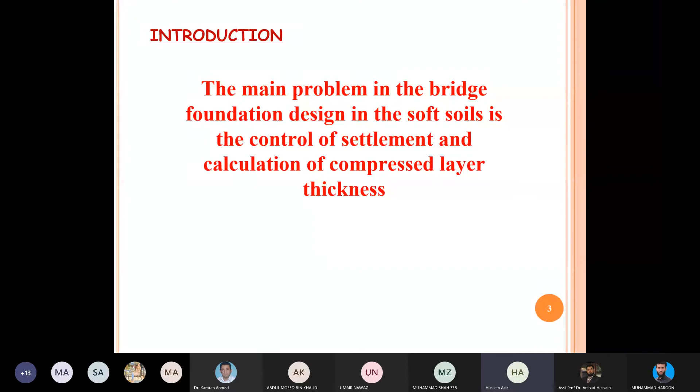Here you see a sample of a bridge. This bridge carries a high-speed railway, constructed in China, carrying high-speed trains at a speed of about 500 km per hour. Here is the foundation, the pier foundation and the girder of the bridge. This is the construction of the pier in the field, and this is the pile cap of the foundation. This is the final shape of the bridge, showing the process of finalizing it by putting the girder in place through the construction steps. This shows the bearing used to carry the girder.

So we start our explanation of the work. This work includes a field program, and this project is the Beijing-Shanghai project.

Hello, brother Hussein. Hello. Hello brother Hussein, are you there? It seems that he's offline, I'm not sure, but his screen is visible. Yes, maybe it's just a connection issue, let me check on the phone. Dr. Arshad, do you have his direct number? Yes, I'm contacting you, I'm calling you.

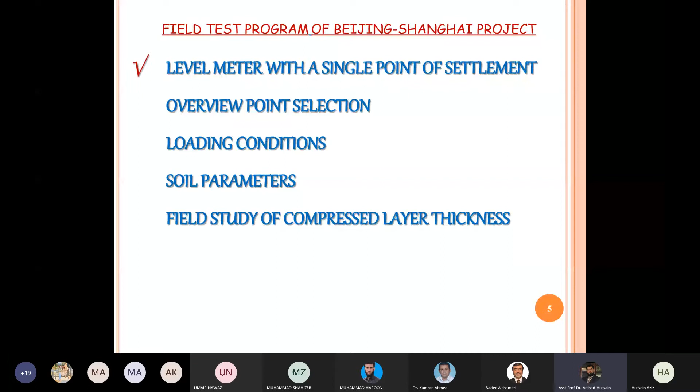Okay brothers, this work focuses on the field test program of the Beijing-Shanghai project. There is a new technique used in this project called the level meter with single point settlement. What does this mean? As you see in this figure, this technique is used in this project. We put a liquid level settlement gauge above the pile cap, and inside the pile, during construction, we put the single point settlement gauge. As you see, this is the pile, and we put this single point settlement gauge. What is the benefit? This is used to calculate the compression of the soil at this depth or point. The second one is also used to measure the compression at this depth, and the third, fourth, and so on.

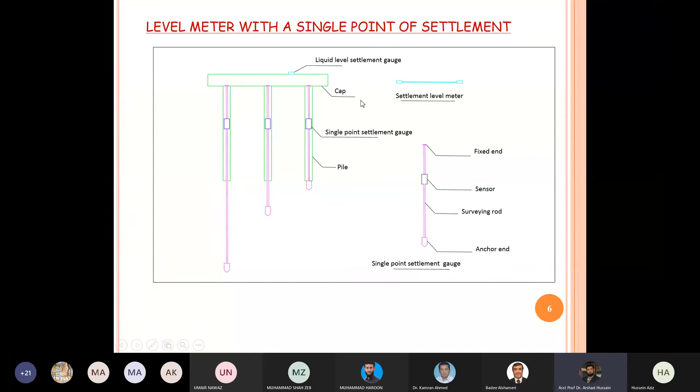As we see in this figure, the single point settlement consists of a fixed end, which is fixed between the pile and the pile cap, and there is a sensor to measure the compression, and the surveying rod, which is extended along this pile, and an anchoring end, which reaches the required depth. This is the settlement, void settlement, and liquid level meter, which works upon the equality of the liquid. This is the technique used to measure the compression.

We see here again, this is the single point settlement. This is the sensor, and this is the rod, and here we put the top cap. Actually, we have three liquid levels with the same level of liquid.

But when the settlement happens for the bridge, of course the level of the water will be different. Therefore, we will measure the total settlement. The main concept of calculating the settlement is to calculate the final settlement, which will be calculated here by the level liquid settlement gauge.

This is put, as we mentioned before, on the top of the pile cap. Therefore, when the pile cap is settled down by the settlement or by the compression, this device will calculate or measure the total settlement. The total settlement, including the compression, will be here in this position, the position of the pile.

This is the compression, in addition to the settlement under this position in the compressible area. Therefore, this device is used to measure the total settlement, which consists of the compression in this position of the single settlement account, and also the settlement under the pile bottom here in the compressed soil area.

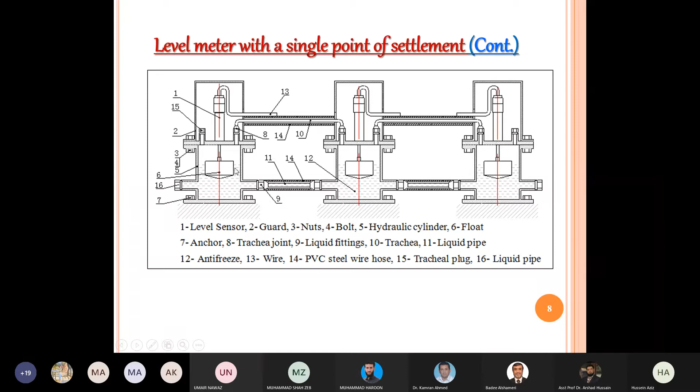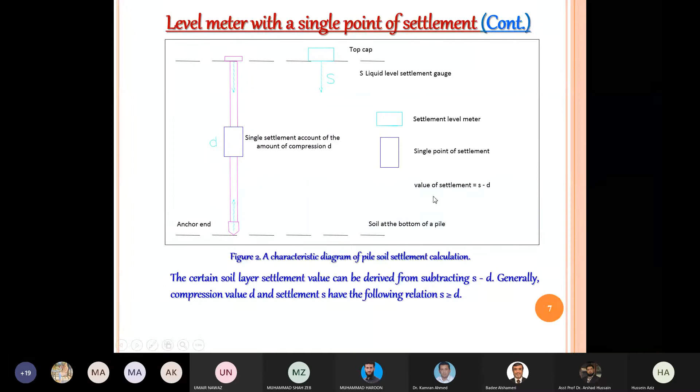At the beginning, the liquid was the same for the three, but when one of them that is put on the pile cap of the bridge settles down, the liquid level will be different. Therefore, this difference will calculate the total settlement. As we mentioned before, the total settlement we named S. We should subtract from it D, which means the compression here, to find the settlement under the pile bottom. This is the concept of our work.

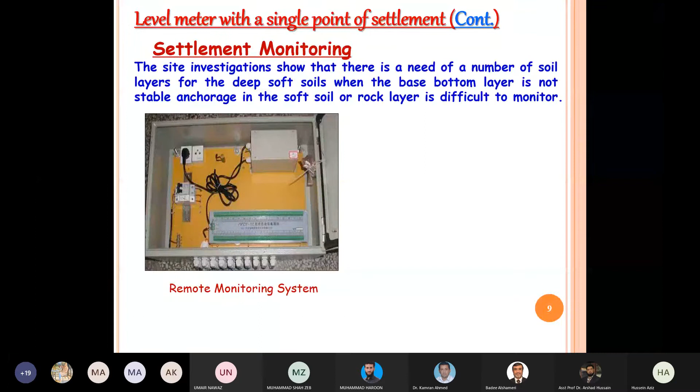This device is used in the monitoring system. As you know, we cannot calculate the settlement by hand or manually. We should use an electronic device to measure the settlement. Therefore, we use this device, which is named the remote monitoring system.

This figure shows the settlement liquid level meter. There are two, which we mentioned before, that will be put on the zero point of zero settlement. And the third one will be put on the surface of the pile cap. This method is used to calculate the settlement in deep soft soil areas, and when the rock layer is difficult to monitor, meaning it is very deep, this technique is beneficial for this case.

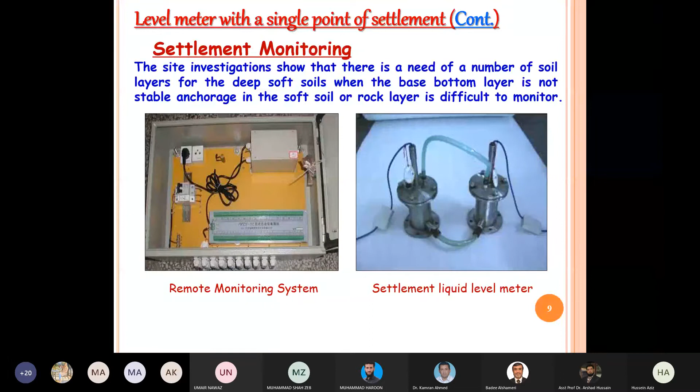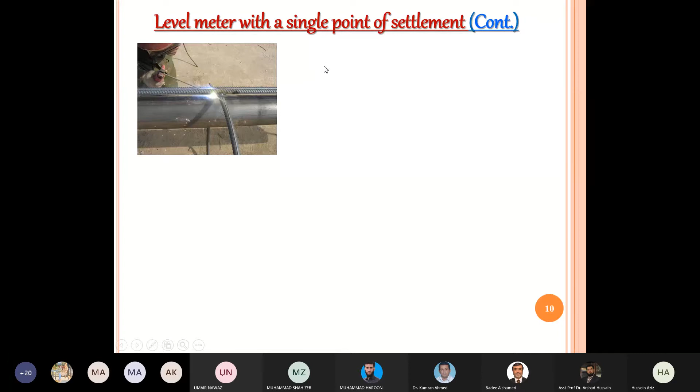The process or procedure of construction and testing: as you know, there is a reinforcement of the pile. We should put this pipe, which means it is the settlement point. We put this pipe and weld it, as we see in this figure. This is the first step.

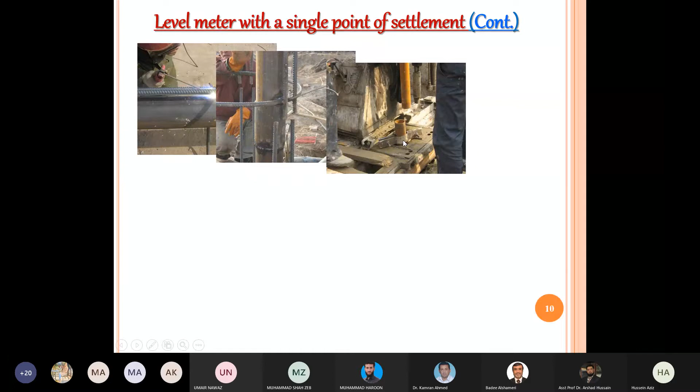After that, we make it vertical, to put it inside the casing of the pile. After that, we fix it inside the pile casing. This is the pipe, and we fix it. If we need to elongate it, we put another piece, as we see in this figure. And after that, this is the pipe only.

This rod means the single point of settlement. As we mentioned before, this is the single point of settlement. We put it inside the pipe. As we mentioned before, it consists of a rod, a sensor, and a fixed point.

We put the sensor here, in the middle as we mentioned before, and connect it by wire, and connect it with the remote device like this. After that, we put concrete here to make it stable and not moving, taking only the wire, and connect the other wires. This is the device used to measure the settlement.

This is the level meter. This one is the level meter. As we mentioned before, it will be put on the pile cap. This is the pile cap.

After that, we fix the level meter here and connect the other wires, and then we start measuring the settlement by putting the level meter on the pile cap and putting the other.

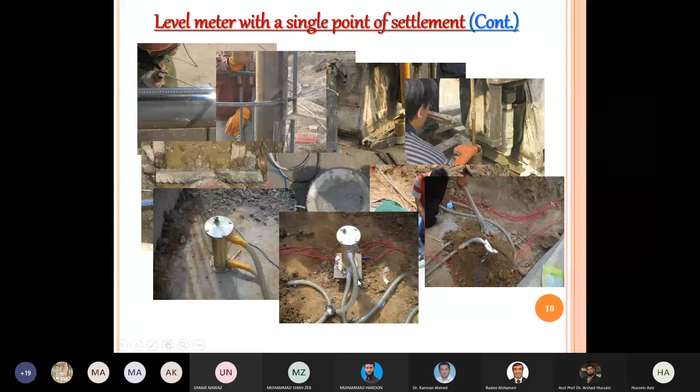This is the reference one, which connects with the other level meter, and as we mentioned before, it will be put in the position of zero settlement. This is the position of zero settlement. This is the procedure of the testing.

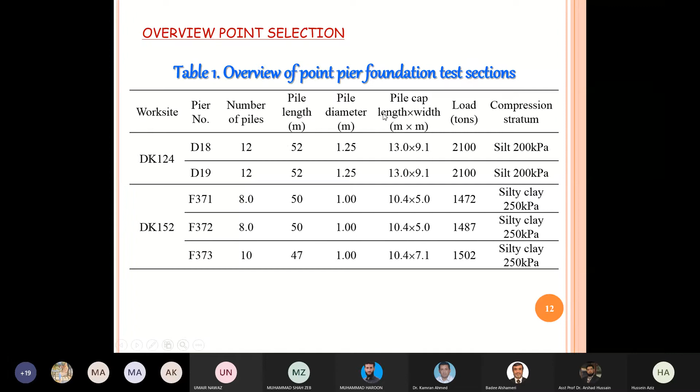And the load here is more than the second one. Here the load is about 2100 tons, while here the load is more or less, as we see here. Therefore, the requirement of the design in DK124 is more and needs a larger number of piles, larger pile depth, pile diameter, and larger pile cap dimensions.

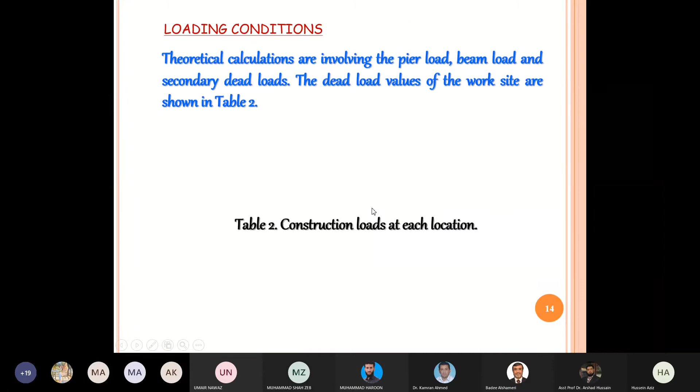The loading condition consists of the construction loading. That means when we calculate the settlements in this project, we don't need to take the live load into consideration. Why? Because the final settlement will be obtained after the final step of construction. The first step of construction is to put the piles, then the pile cap.

After that, the beam. We start to calculate the settlement at the beginning with the beam, which is here. After that, when we construct the beam, then the secondary dead load, which means pavement, fence, and finishing, etc. This is the total load.

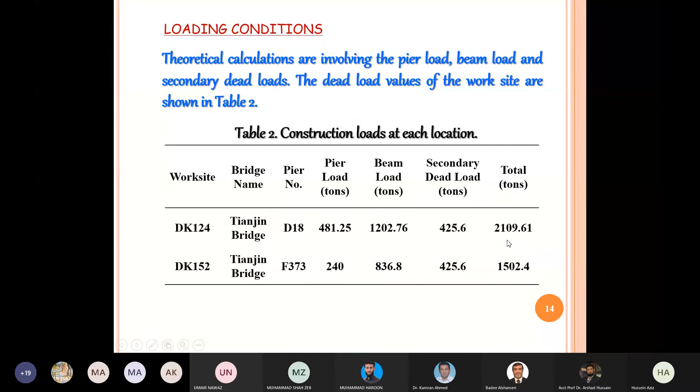This total load means the dead load, not the live load. This will be taken into consideration to calculate the settlements, not the live load. As we see here, DK124 has 2,109 tons, and the second one is like this - that is the difference between them.

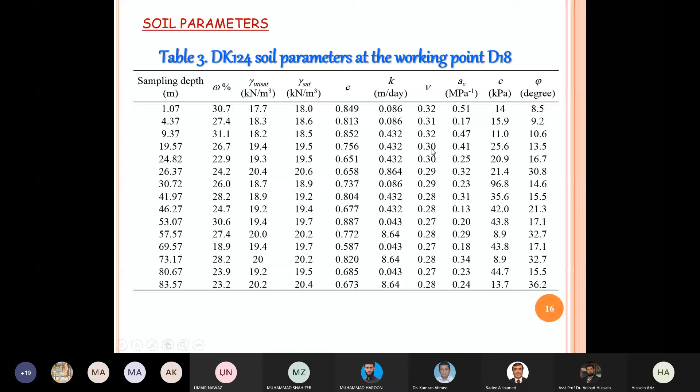The soil parameter - when we study a project, we should take into consideration the soil parameter. This table shows the soil parameter of the work site DK124. We should know the water content, gamma saturated, unit weight, void ratio, coefficient of permeability, Poisson's ratio, cohesion, and phi, etc. This is the soil parameter which we know and is useful in our calculation.

Field study of compressed layer thickness. Now we will study the compressed layer thickness, starting with the DK124 work site.

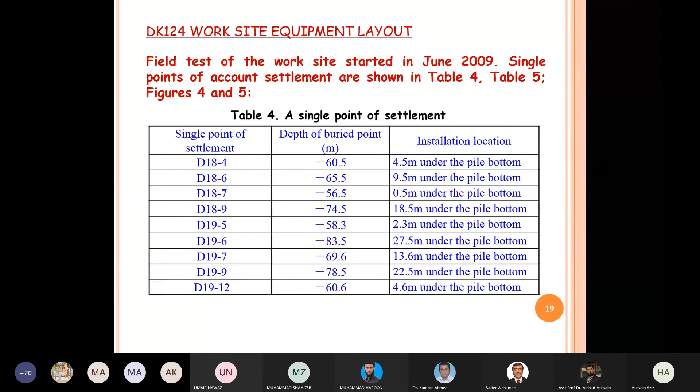After that, we will get DK152.

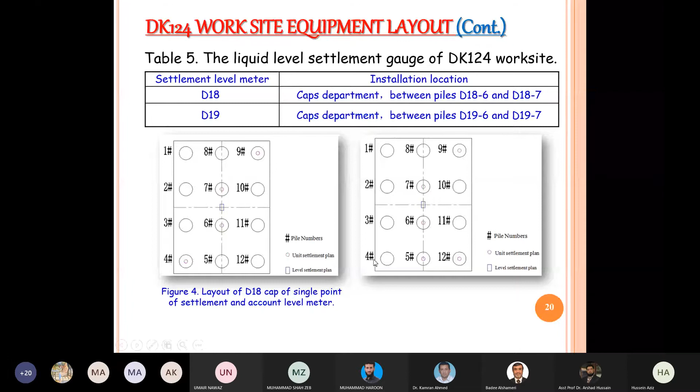My brother Rashid, everything fine? Go ahead. Yes brother, you can continue. Yes, okay, that's fine, because I only see the screen of PPT.

This DK152 also, at the work site, we take different depths under the pile bottom, as we see here.

55, that means when we subtract the depth of the pile from 55, we get 5 meters under the pile bottom and 10 meters. Within the pile bottom, the depth of the pile is 50, so 50 minus 50 is 0. This is the pile bottom position.

After that, 20.3 under the pile bottom - we take different depths under the pile bottom to calculate the compression or settlement there. Why under the pile bottom? Because the compressed layer is under the pile bottom.

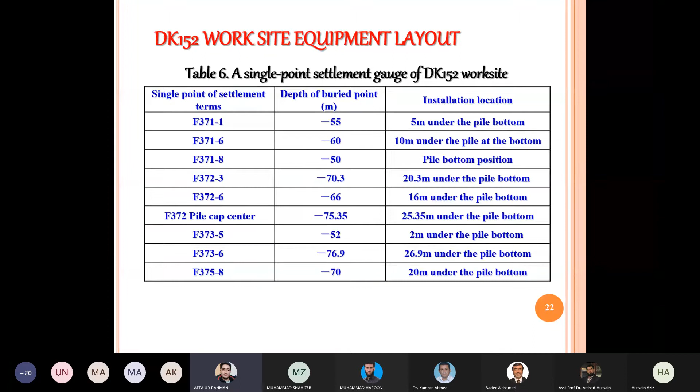We also see here the second work site, DK152. The dimension here is less than the first one, and how many do we use? Only three. The first one we used three of here because the requirement is less. This is for F371.

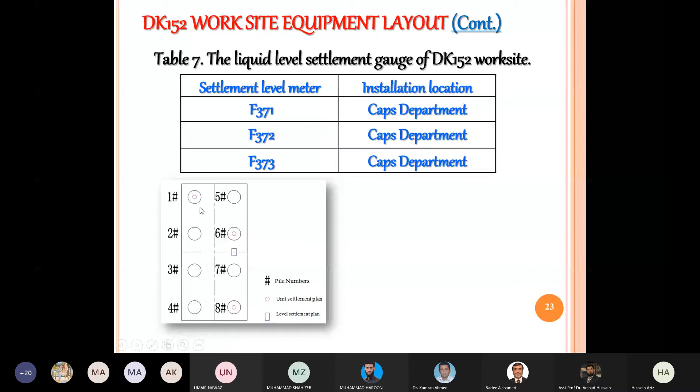And this is for 372, where we use only two single point settlement units - two units of the settlement plan. Here we use three because the dimension is bigger than 372. This is for 373.

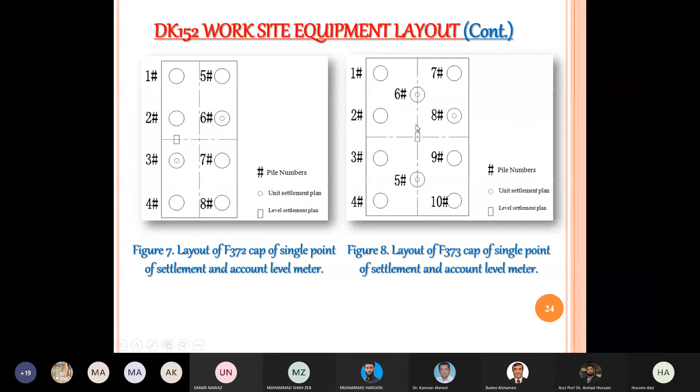It becomes stable, and the difference becomes very small. That means the compression becomes less and less as the depth increases.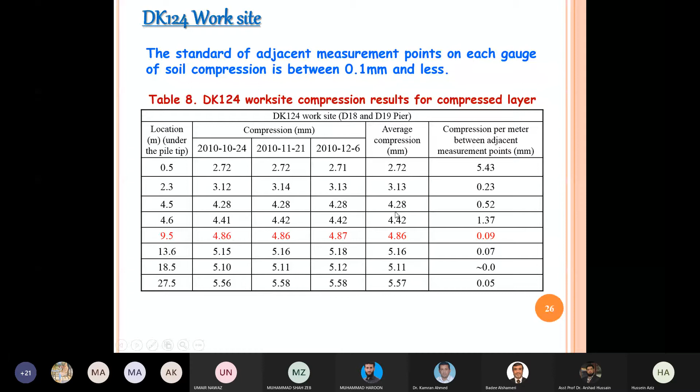The difference between 3.13 and 2.72 is larger, and also for 4.28. But for 4.42 and 4.86, the difference has become smaller.

After that, it becomes constant, for 5 only 5.

That means when we calculate the compression per meter - meaning how to calculate it - when we divide 2.72 by 0.5, we get 5.43.

This number is obtained by subtracting 3.13 minus 2.72, over 2.3 minus 0.5.

That means the difference between these values is 0.23, showing that the compression per meter has become smaller, approaching nearly zero.

At this point, we stop the calculation of settlement, and after that we consider the settlement at this depth to be 0.

That means 9.5 shows the thickness of the compressed layer. Why? Because after this point, the settlement will be neglected.

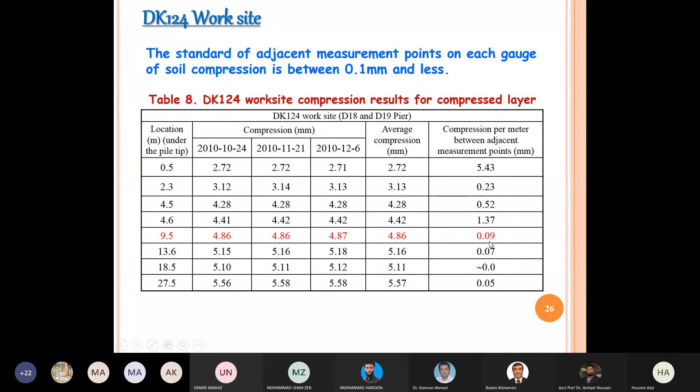Why? Because this is the cumulative of other depths. So we also take this work site DK124, the same way. We see the cumulative compression increasing with depth, and we should reach the final value.

This is the final value of settlement for both pier number 19 and number 18. We see the total settlement here with the construction steps reaching a value of about 7 millimeters, between 6 and 7 millimeters.

The value of 7 millimeters in our calculation, according to the standards and codes, is a reasonable value, because the limitation in the Chinese code for this project limits the settlement to about 10 to 12 millimeters. We now get a settlement of about 7 millimeters.

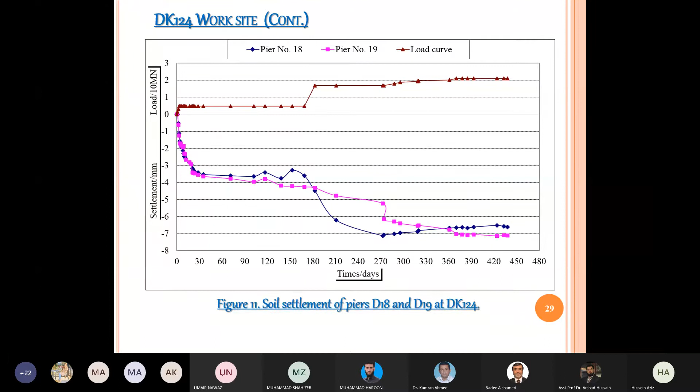We repeat this procedure for DK 152, the same procedure as before. Here also we will see the compression. The average compression per meter at depth 0.5 is about 8.25 millimeters. It will become minimized to about 0.09, meaning close to 0. When we reach this value, we stop calculating the thickness. We see that at depth 10 meters under the pile bottom, we get zero settlement.

After this depth, the settlement will be neglected because its value is very, very small. That means the thickness of the compressed layer for this worksite DK152 is 10 meters, while the first one DK124 is 9.5 meters. It's very near, so 9.5 and 10 can both be considered as 10 meters. Therefore, we conclude the compressed layer thickness is 10 meters.

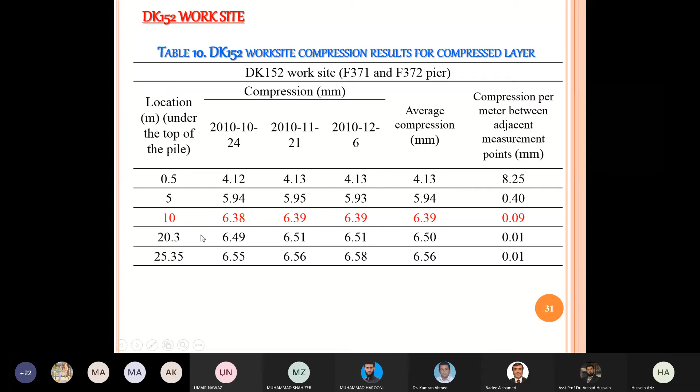Unfortunately, for this worksite F373, we don't have enough points to calculate the thickness of the compressed layer. This is because we start at 3 meters and then jump to 21. This is wrong; we should use 3, 5, 9, 10, reaching to 21. We get values of 3, 1.59, and at 21 it's 0.05, suggesting the compressed layer thickness is 21, but this is wrong. We should use more thicknesses, like 4, 5, up to 10. If we reach 10 we would get a similar value. Therefore, this result can be neglected.

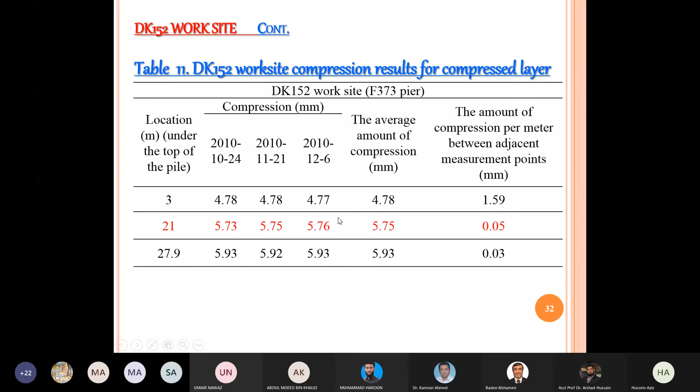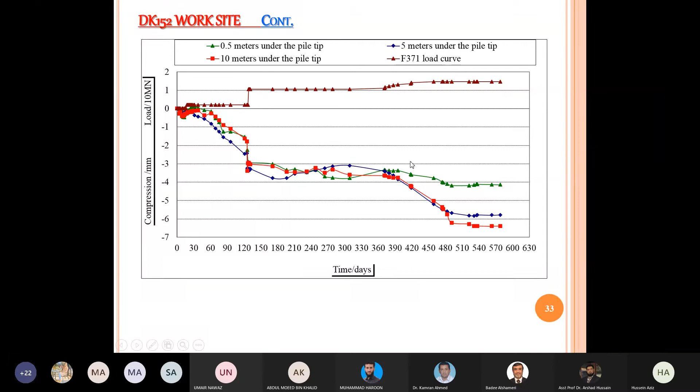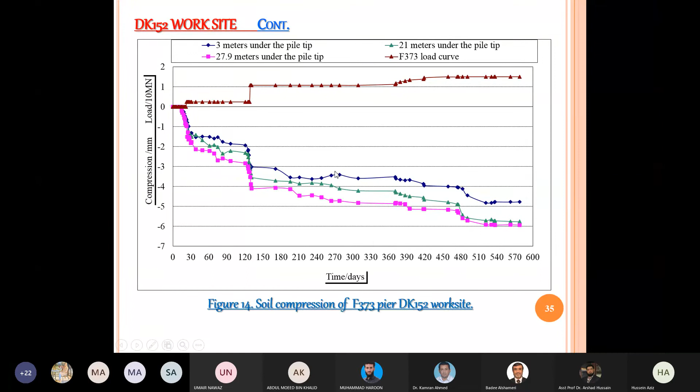This figure also shows the result of compression at different depths, also the second one. We should take the final one which calculates the settlement value. Here we see the final one for the 3-level gauge of F371, F372, F373. The final settlement value reaches about 8 to 9 millimeters. As mentioned before, the Chinese code limitation for settlement in this project is from 10 to 12 millimeters, and we reached 8 to 9 millimeters here. That means this is okay, our design is okay, and there is no problem in our calculation.

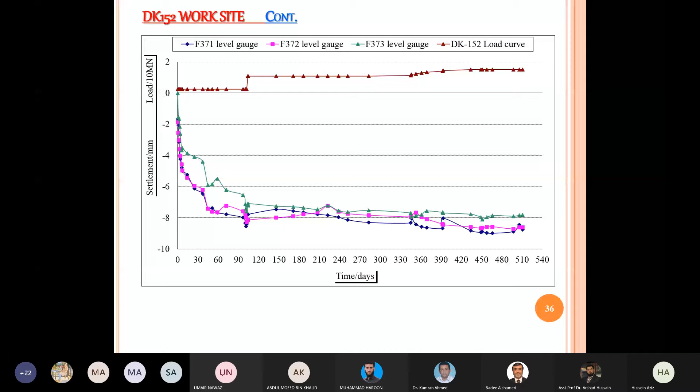This is the final values of settlement for the project. For DK124, we said before the settlement is 7 to 7.1 millimeters, and for DK152 it is 8 to 9 millimeters. These are the final values.

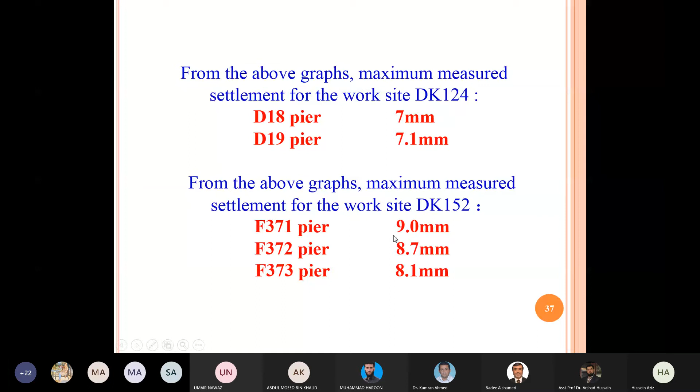The summary for this work: we calculate the compressed layer thickness for DK124 as 9.5, and for DK152 as 10. That means it's very near, so we can assume and use it as 10.

When we compare the compressed layer thickness and the dimension of the pile cap, we divide HS over B, where HS is the compressed layer thickness and B is the width of the pile cap. We see here 1.18 and here 2.5. This gives an indication that when designing the pile cap, we should use a width near the compressed layer thickness. That means when we calculate the compressed layer thickness, it should match the width, and when we divide them the result should be near 1. Here it's near 1, here it's more than 1, meaning this dimension is wrong and not suitable for our design.

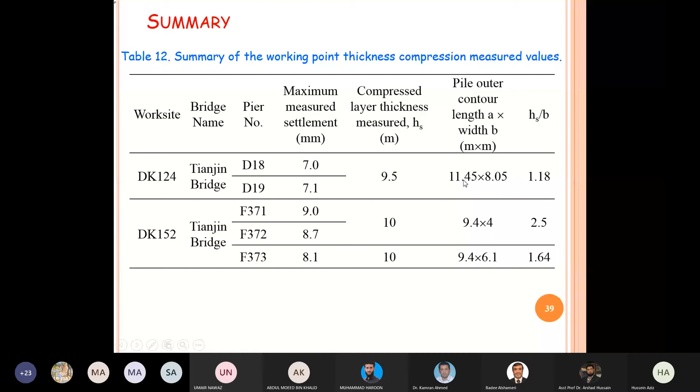Here also we see the codes used. In China there are many codes; for example, this code is JGJ 94-2008, and this one is another code depending on the strain control method. There are different codes using different calculation methods. The first and second depend on stress, while the third requires explaining some concepts for how to calculate this value.

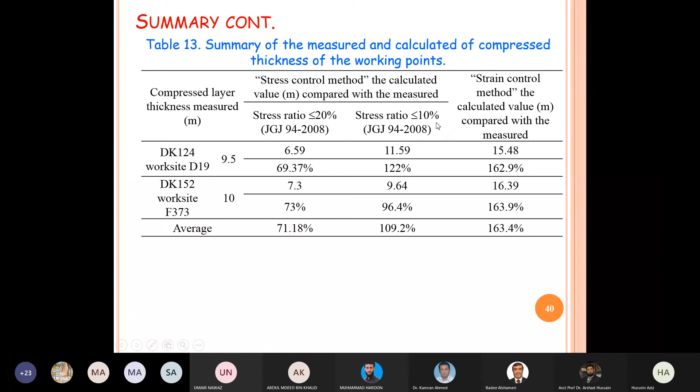The stress control method depends on calculating the stress. When we calculate the settlement, we should reach a depth corresponding to about 20% of the total stresses. At this depth we stop the calculation; this is named the stress control method.

For the strain control method, we should reach a depth corresponding to about 2.5% of the total settlement. At this point we stop the calculation and consider it the point for calculating the compressed layer thickness.

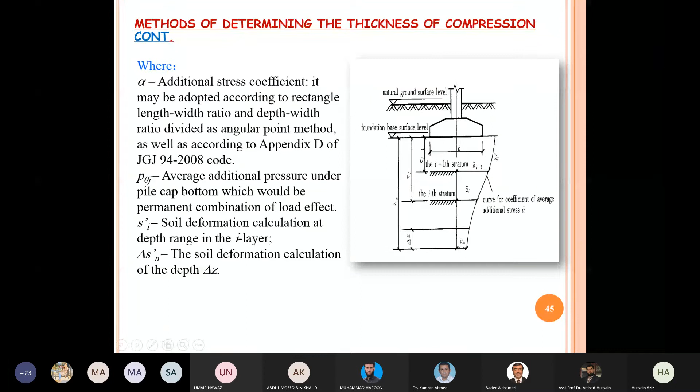Here we return to this table. We calculate the settlement using this code, and also calculate the thickness of the compressed layer. Using this code, the thickness of the compressed layer is about 6.59, while in the field it is 9.5.

This 9.5 is the real value, the true value, because it is maintained from the field, and 10 is also a real value because we obtained it from the field. 6.5 means it is wrong or not accurate. Also 7.3 is not accurate because the difference is about 70%. This is not accepted.

This method is not good for calculation. The other method uses a stress ratio less than 10%. What's the difference between the first method and the second method? This one reaches about 20% of stresses, and we calculate the thickness of the compressed layer.

But this method says no, 20% is not a good value. We should reach 10% to calculate the thickness of the compressed layer. Therefore, we calculate the thickness here about 9.6, which is very near to 10. Also here it is 11.59, also near 9.5, and better than this value. The difference here is 122.

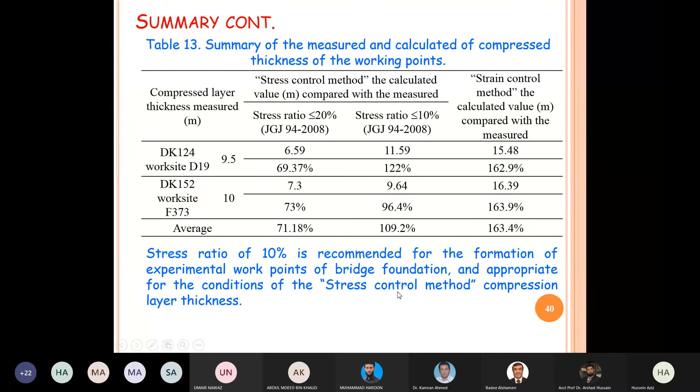But we should use a correction factor. How do we get this correction factor? By dividing the value measured from the field by the value measured theoretically, we get an empirical correction factor. This is used to correct our theoretical calculation, which is also done using the code.

The method of determining thickness of compression. There are two types of calculation: stress control method, as mentioned, when we reach about 20%, or another version when we reach 10%, which is better. And strain control method depends on the calculation of settlement, when we reach about 0.025 of the total settlement, after which we calculate the settlement.

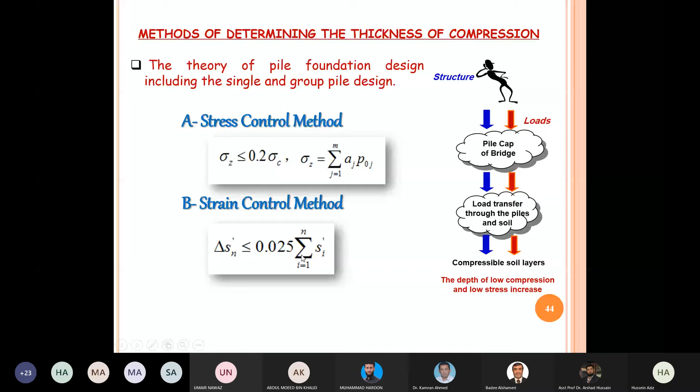That means when we reach a value that is negligible in the calculation of settlement, or the settlement is very small, we stop calculating the settlement. Here we also mentioned the distribution of stress in this figure, and we will mention the codes used in this study.

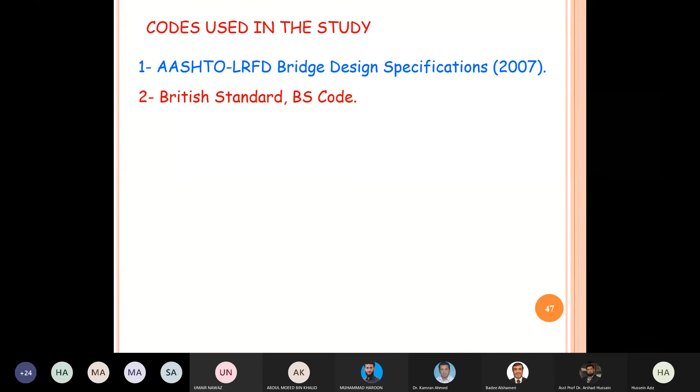We use in this study the AASHTO code, the American code, the British code also, but we don't mention this result. Three Chinese codes, and the British code, and AASHTO code.

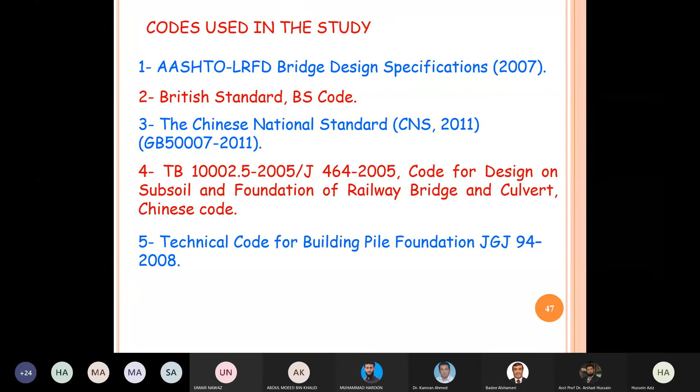Therefore, someone may ask why the theoretical calculation is different from the field calculation. Why do we get a very high value in theoretical calculation? Does that mean the theoretical approach is wrong? No, it is not wrong.

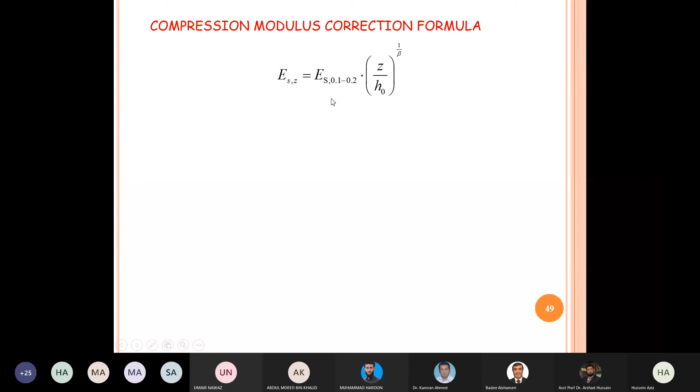But the inputs entered into the equations are wrong. For example, this value, E, is the compressed modulus, or compression modulus, which is calculated between two stresses, between about 100 kilopascal to 200 kilopascal. This is suitable and gives a correct answer only for shallow foundations, but when we use deep foundations, this is not correct.

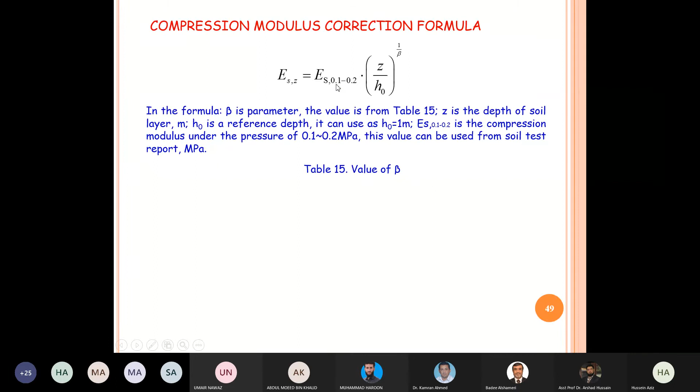While we use only a fixed value, only ES between 0.1 to 0.2, that means this is wrong. That means ES is increased by increasing the depth here. So we should make a relationship. Therefore, we propose this equation to calculate the compression modulus. Why? Because the compression modulus increases by increasing the depth, meaning it is proportionally increasing. So this is the first thing.

Also, we should fix the depth of the layer. Sometimes we use depth of layer 1 meter, sometimes depth of layer 5 meter. We should take this into consideration in our proposed equation. Therefore, we divide the value of Z by H naught, which means the reference depth. In our data, the thickness of our layers is about 2 meter, 1 meter, 3 meter. Therefore, we assume in our calculation H naught is 1 meter. But when we use another project, for example, where the thickness of the layers is about 5 or 6 meter, the H naught should be increased. So we mentioned that ES is depending on Z.

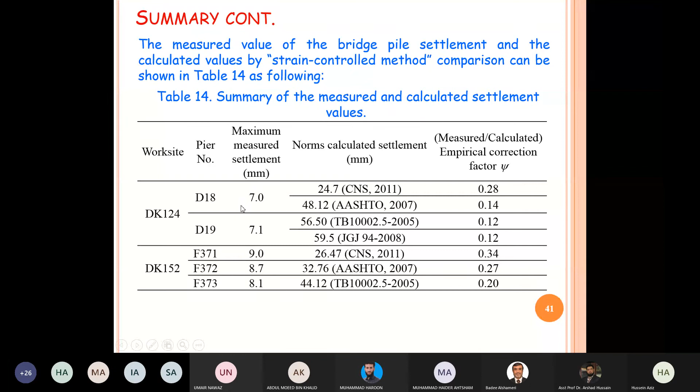Therefore, we should repeat our calculation. We said this in our course: the calculation was very different between the real calculation, the 7, and here very high. We will repeat this calculation depending on the new value of the compressed layer thickness. Therefore, we take this into consideration in our calculation, and we take these values here.

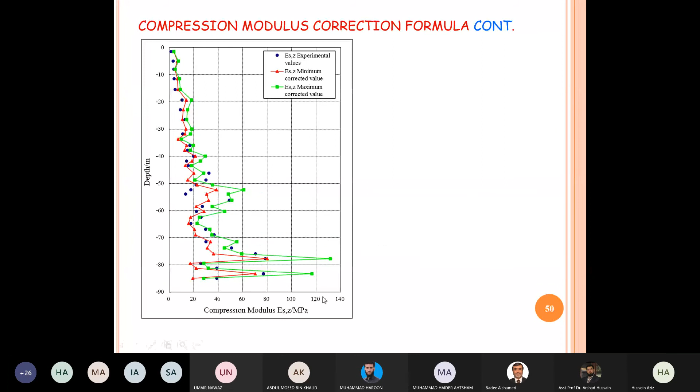We should also mention these dots, the blue dots. This is ES experimental values. We check this equation with the experimental value of ES. It is nearly matching - you see the blue one matching with the red and green. The blue one is the experimental value, the red is the minimum value, and the green is the maximum value.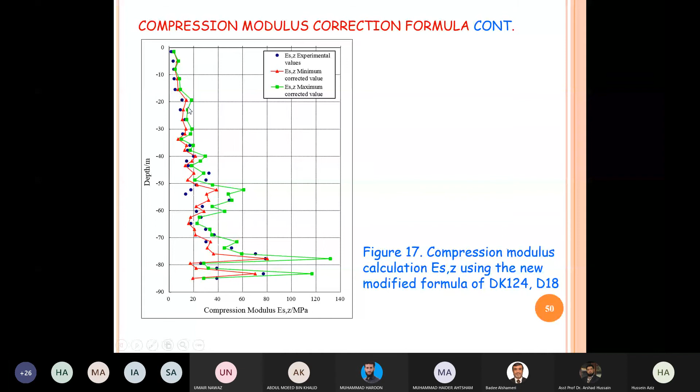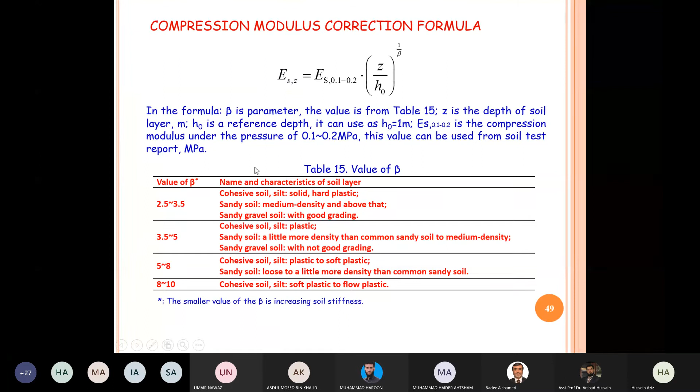Why minimum and maximum? Because in the table there are two values, 2.5 to 3.5, 3.5 to 5. That means for the value of beta, if we take this layer, we calculate ES for 2.5 and calculate ES for 3.5, so we get two values. The lesser value is the red one, and the larger value is the green one. This is for DK 124, and for DK 152 also we take this result. We see the result of our proposed equation is matching with the experimental value.

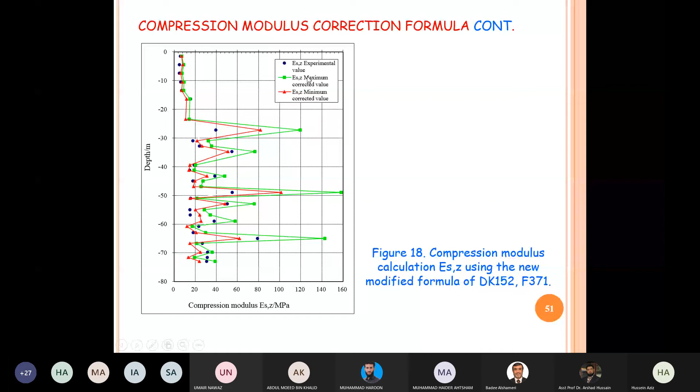Theoretical results - now we will check the theoretical results again using the proposed equation. Firstly, by calculating the thickness of the compressed layer. When we use ES 0.1 to 0.2 versus the proposed value of ES, we see the value of compressed layer thickness - 6.5 is the same, 22 is the same, no change. That means the proposed equation for ES is not beneficial for calculating the thickness of the compressed layer.

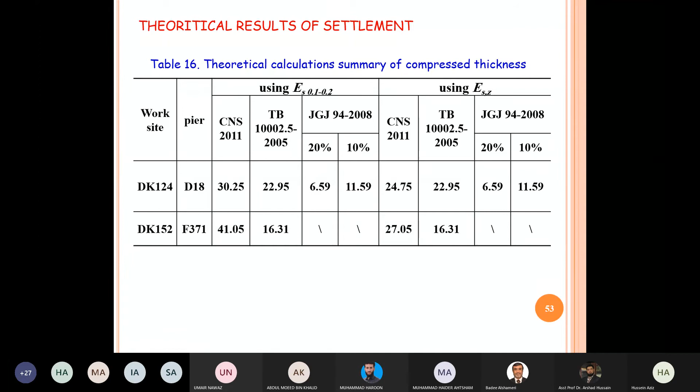We will check it again to calculate the settlement. We see the value of settlement using it turned from 65, for example in TB code, to 7.28. That means it's very good - we get a value very near to the field. In CNS code, it was 24.7; by using the ES(Z), it becomes 7.24. This is also very good. Also for others: 7.2, 8.1, 6.23. That means the result of the settlement becomes very good here. This proposed equation is suitable to be used in the calculation of settlement.

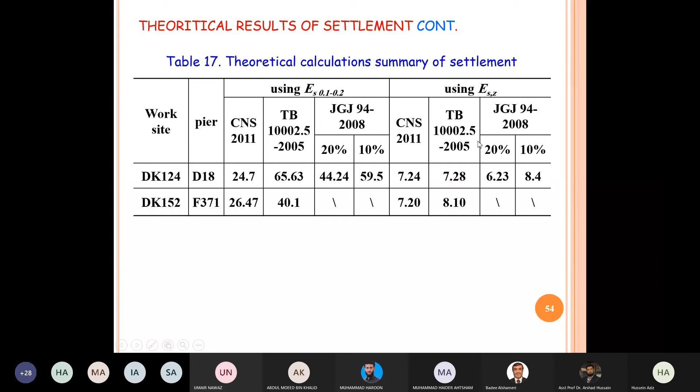We will check this proposed equation by using a finite elements program, Plaxis Foundation program. As you know, there is a program to calculate the settlement using finite elements simulation, named the Plaxis program. We take two models, DK124, and we see this model. The different colors show the layers of the soil, and here is our model, the loading, and the mesh of the finite elements.

This is the first one, and the second one also shows the different colors of the soil layers, our project, and the loading. The mesh is more coarse than the first one, so this is softer, meaning the result here is better. We will see.

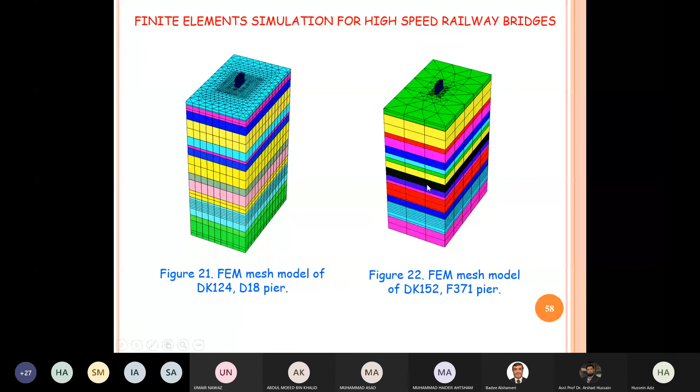We calculate the total displacement using Plaxis Foundation. Using ES between 0.1 to 0.2 megapascal, we get about 88 millimeters. That is very high, very high, not accepted. But by using the proposed equation, the value is 10. It's very near, reasonable, 10 millimeters.

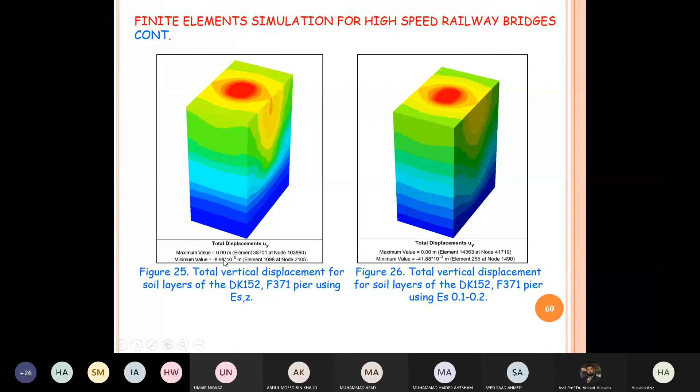And also when we use it for DK152, the value using ES 0.1 to 0.2 is about 40 millimeters, but here it's about 9 millimeters. It is a very good value. We will repeat this for other models: here 82 millimeters, here 10 millimeters. Very big difference between the two values.

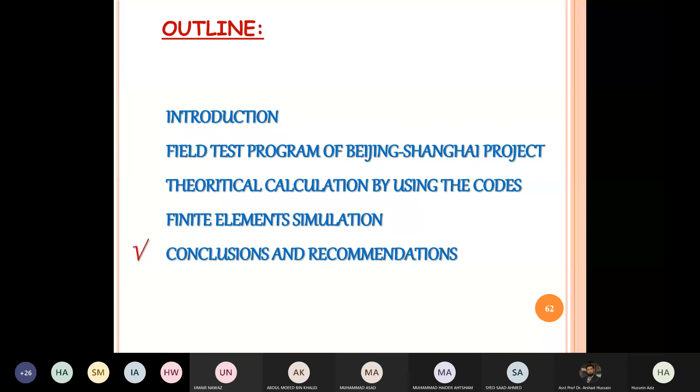Now we will reach the conclusion and recommendation. First conclusion: the bridge pile settlement of the experimental work site is far less than the values of standardized calculation. The empirical correction will be used. As mentioned in this research, calculating the settlement using the codes theoretically gives us a much higher value. Why? Because of the wrong use of the theory.

No, but by entering the value that we enter with this equation, we can also use an empirical correction factor. The limitation in the codes gives us a range between 0.2 to 1.4, but in our calculation we find a value about 0.1. That means the code ranges this value from 0.2 to 1.4, but we should say to the code this 0.2 is not enough, we should make it 0.1.

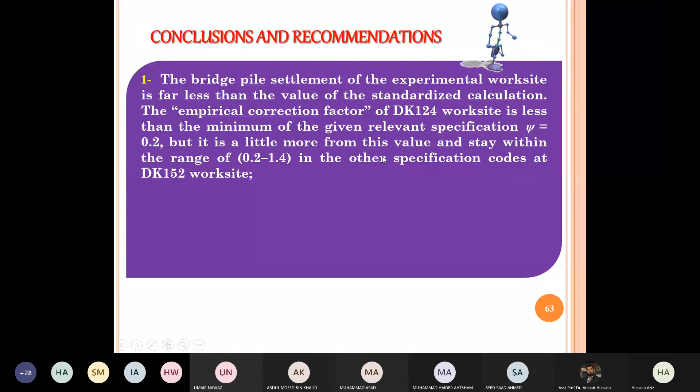This is only a suggestion, because we found it by calculating the values. Single point settlements and hydrostatic level is the new technique we explained at the start of this lecture. What is the benefit of this technique? It is used to overcome difficulties when the bottom layer cannot be stably anchored, and the soft soil or rock layer is difficult to monitor. This technique is very good for this difficulty.

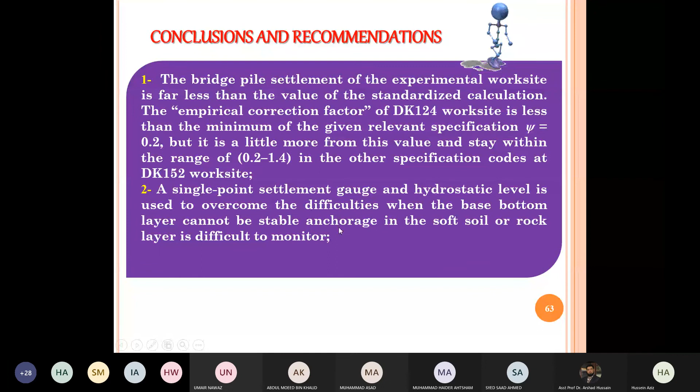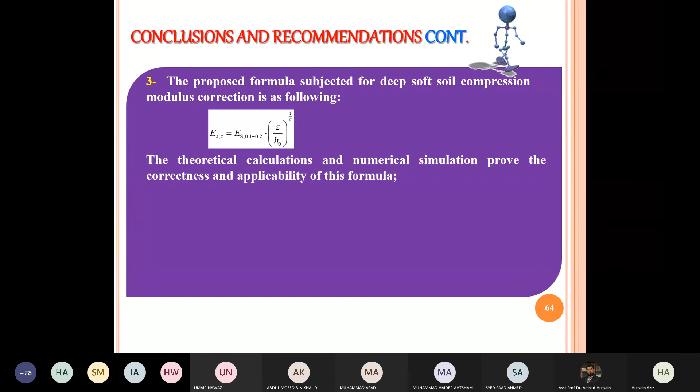Also, we proposed this equation. This equation is very good and corrects our theoretical calculation using the codes, and also corrects our calculation using the finite element program Plaxis. When we compare between the codes, we find that the Chinese code, CNS code, is more suitable than other codes. All codes give not entirely correct values, but comparing between them, the CNS code gives the best calculation.

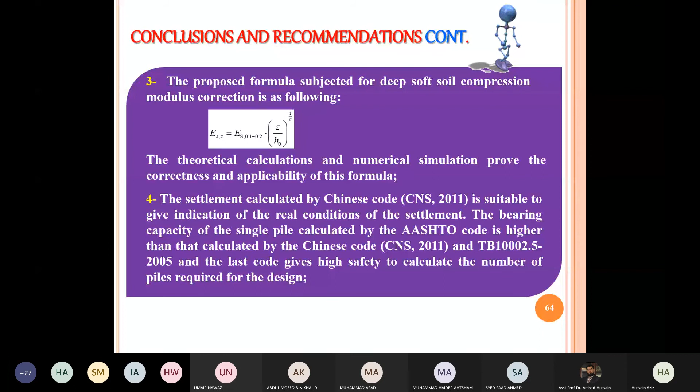Maybe in one case it works, but compared with another case, maybe it becomes less beneficial. Now, thank you. Recommendation: we should use the correction formula applied to another site, since maybe this formula is only suitable for this site. We should test this formula on another site.

Also the factor beta - maybe the range of factor beta is not suitable for another project, so maybe we need to increase the scope of the factor beta. And H naught - selecting one H naught equal to 1 or another value should involve more judgment. We use more judgment to calculate this value, and we should give a rule to calculate it.